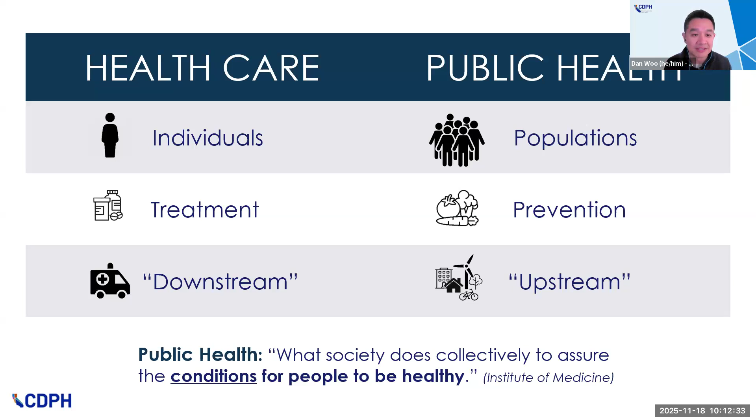As I learned more about public health, that really connected with how we designed and planned and built our communities, whether or not people can walk and bike to places. That really looks at the population level and how do we prevent poor health outcomes and illness and disease from occurring in the first place. So that takes more of an upstream approach, looking at our natural and built environments, our socioeconomic environments as well. At the bottom of the slide is a definition that my team really likes to put forth: public health is what society does collectively to assure the living conditions for people to be healthy. This is based on the Institute of Medicine's definition.

Again, some more background conceptual diagramming here. Part of addressing public health and looking upstream is to focus on root causes, or the causes of the causes, for negative health outcomes. That is linked to the root causes of unfair or inequitable living conditions that result in poor health outcomes for certain populations versus others.

For those in the public health field, this is not new information. Studies have found that only about half or so of our overall health outcomes is because of medical care, healthy behaviors, genes, and biology, while the other half is really attributed to what are known as the social determinants of health - environmental quality, social and economic circumstances, our built environments - and all of that in turn shapes our stress levels, our behaviors. That touches on things like smoking, diet, and exercise. Our goal in public health is to move towards the left, upstream, towards these broader solutions that can help prevent what you see on the right side of the slide, which is more of that downstream disease and injury. So living conditions at the center is where there's a lot of opportunity.

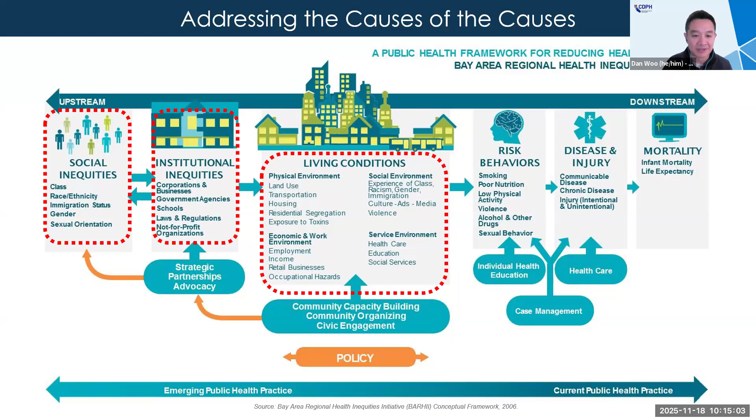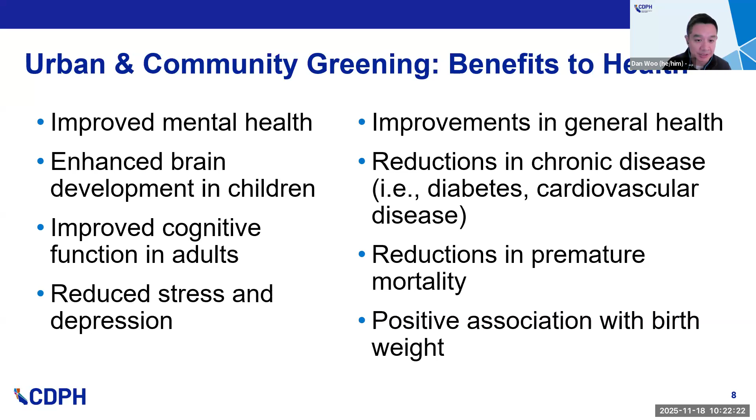I'll also touch upon how urban greening can really help to promote physical activity and social cohesion, and those are also ways that can help with health.

Part of this, and I think a lot of the work that ATP grantees and folks attending this are probably already seeing and realizing, is that green infrastructure and community greening can help to encourage more transportation-related physical activity, so active transportation, like walking, cycling, and taking transit. And active modes of transport are critical because it can help to facilitate physical activity.

And the flip side of that is that the lack of physical activity contributes to the early deaths of an estimated nearly 20,000 Californians each year, primarily due to chronic diseases like heart disease, stroke, cancer, diabetes, which are some of the top causes of death in California and across the US.

So this slide is showing some of the findings that our team did to quantify the health benefits associated with more active transportation. This modeling exercise specifically looked at what some of the health benefits would be if we were to meet the California Transportation Plan's 2050 goals for increased active transportation.

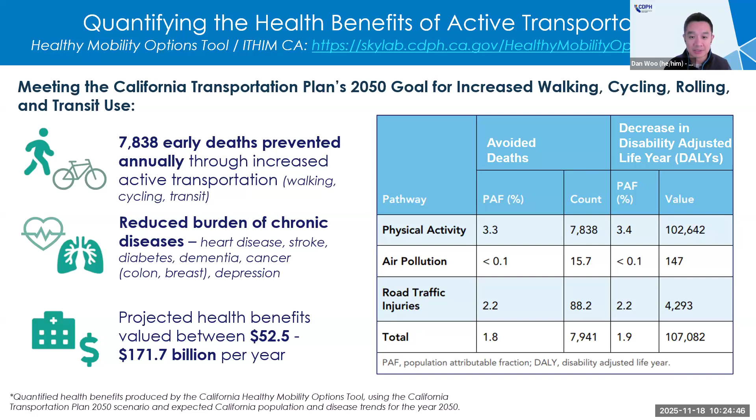A key point here is that the health benefits are predominantly from increased physical activity versus other benefits. So you will see some reduced air pollution and carbon emissions, but that physical activity piece is just super, super important.

So next, I want to dive a little deeper into extreme heat. That is the top extreme weather-related cause of death, and it's something that California has increasingly faced. Green infrastructure can definitely help increase resilience to hotter temperatures in our neighborhoods.

I'll go back to the backdrop of climate change, which is leading to more frequent, more severe, and longer periods of extreme heat. Last year was the hottest year on record globally.

Heat is deadly. Heat kills more people than any other extreme weather related hazard, approximately 1,220 people dying from extreme heat every year in the US based on estimates. We know this is an undercount because a lot of the deaths that are heat associated are not officially recorded on death records as being due to heat. It could be a cardiovascular reason, but that may have been triggered because of hotter temperatures.

So here we see many ways that heat can affect our health. I won't go into all of them, but some are fairly common knowledge, dehydration, heat-related illness and death. Heat really can worsen chronic health conditions, whether heart conditions, respiratory, or kidney disease, and effects like pregnancy and birth outcomes.

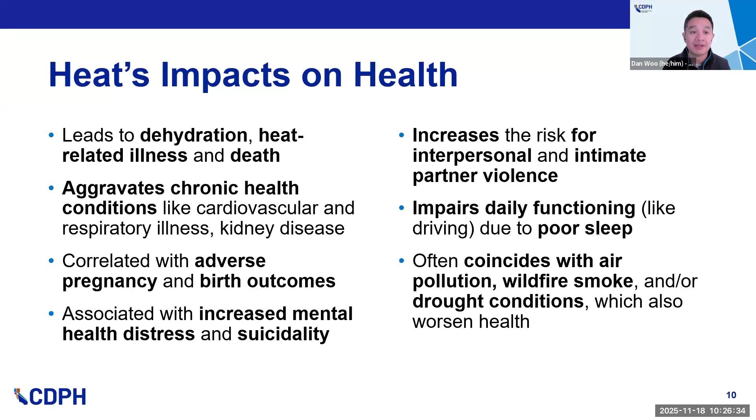I'll zoom out a little more. I talked about the individual level heat impacts. At the community level, how we design our neighborhoods and cities really impacts how people experience heat and how they fare overall on hot days.

In many ways, cities are hot by design. There's a lot of asphalt and heat trapping building materials like dark roofs and lack of vegetation and tree canopies that cause our cities to experience the urban heat island effect, leading to things like schoolyards being too hot, posing significant health risks to people, and particularly to children.

And how we've designed our suburban neighborhoods—a lot of the sprawling, car dependent neighborhoods just result in more cars on the road, emitting heat waste and a greater amount of paving of natural landscapes and farmlands for roads. That also reduces cooling land cover.

Air conditioning can help in the short term, but relying on it too much can also create more risks for the long term, contributing to greenhouse gas emissions, which has implications around energy use and costs for households. All of that is to say that we are facing a lot of complex, multi-layered issues around heat.

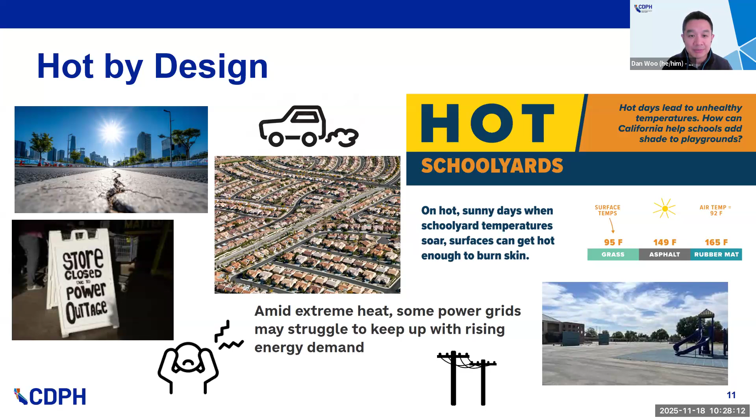But the good news is that we have a suite of solutions available, one of which is green infrastructure strategies. Lining streets with trees with native plants and adding green roofs and walls are an important part of creating cool corridors to reduce the urban heat island effect and air pollution.

Shade is one of the most effective ways to cool our bodies outdoors, just reducing the amount of direct heat exposure when we're outside. This is where shade trees can really significantly reduce the amount of heat and exposure to people in buildings.

There's been a lot of great research and work being done by the UCLA Luskin Center for Innovation, led by Dr. Kelly Turner and team, around heat and heat resilience for communities and urban environments in particular.

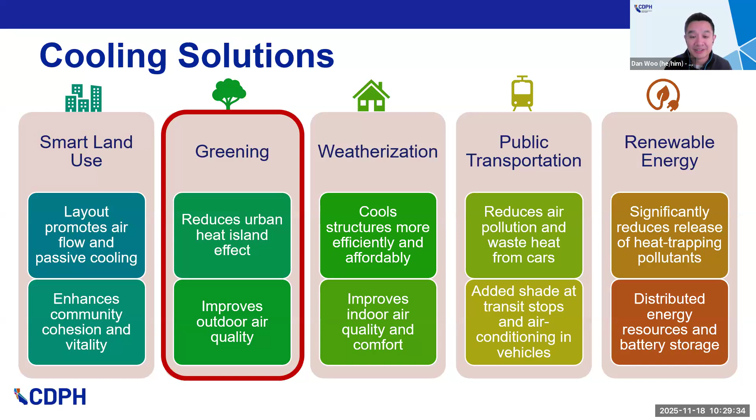They found that shade can reduce outdoor heat burden as much as 30% or more. This can provide critical relief to communities that have less resilience or greater vulnerability to heat. So greening is an important part of our toolbox for ensuring safe and livable communities.

Finally, I'll touch upon some other funding options folks may be familiar with. We have the California Natural Resources Agency's Urban Greening Program, which funds projects that reduce greenhouse gas emissions, but also helps increase the greening in our communities. And CAL FIRE's Urban and Community Forestry Grant Program works to increase the long-term benefits trees provide, and also to mitigate the risk of environmental harms and exposures. At this moment, these grant programs don't currently have an open round of funding, but you can sign up to receive notices when the next round becomes available.

So with that, I will wrap things up. Thank you very much, and I'll turn it back to Alicia and team.

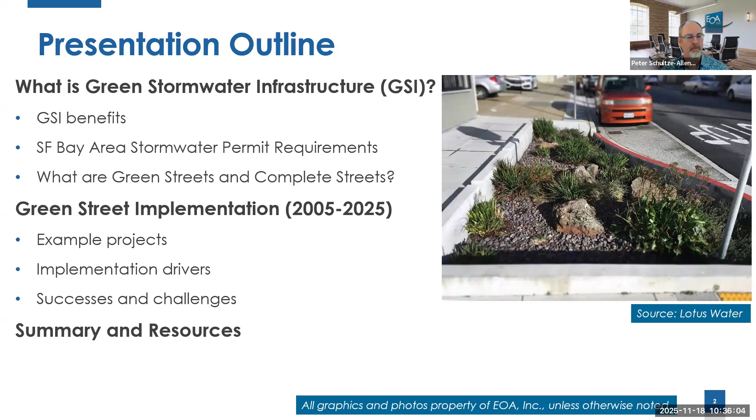I'll talk about the benefits of GSI, our Bay Area stormwater permit requirements, and what green streets and complete streets are. I'll give examples, discuss implementation over the last 20 years, challenges and successes, and what's driving implementation of green streets. Then I'll give some resources and a summary.

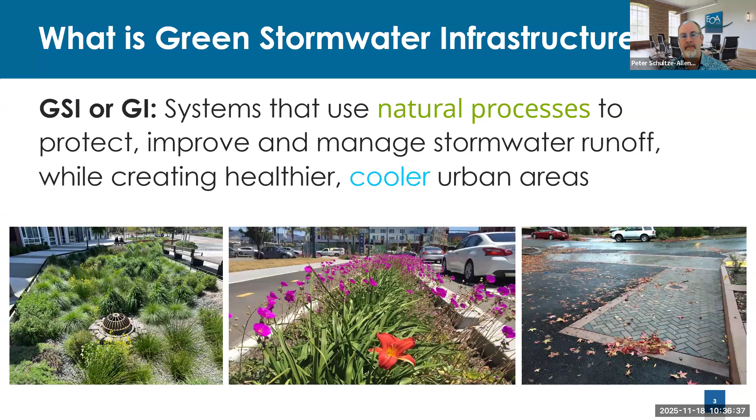We've already talked about this, so I don't need to spend much time defining GSI or green infrastructure, but basically we're using natural processes in the urban environment. These are photographs of different systems around the Bay Area. Cooler urban areas is the goal in a lot of ways now, and we want to use GSI to increase that cooling effect and cool cities in general.

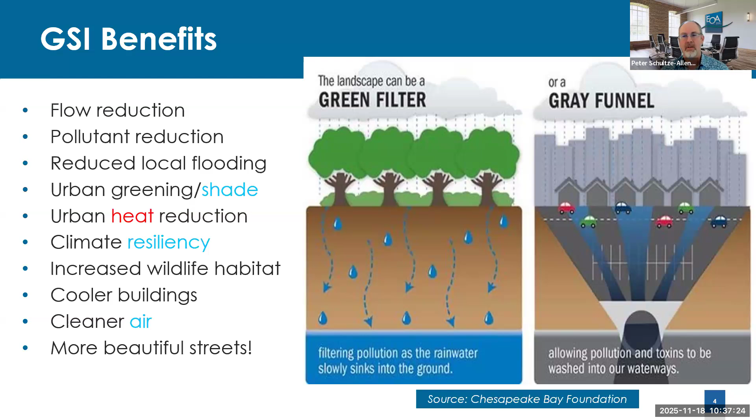There are a lot of benefits, many of which we've already heard about today, so I won't go into detail, but I highlighted heat and shading, resiliency, and cleaner air. We like this graphic showing how GSI can act as a green filter, whereas our typical situation has a lot of impervious surfaces acting as a gray funnel. This isn't just about pollution, but also temperature into receiving water bodies like the San Francisco Bay, the volume of water, and sediment and erosion. There are many different aspects of stormwater management.

That leads to my background point: we're changing our approach to stormwater and now recognizing it as a valuable resource. However, it can be polluted by various impacts in the urbanized environment, sometimes from legacy pollutants. This can result in certain fish not being recommended for consumption by certain populations or at certain frequencies. So we're trying to improve the quality of our stormwater and use it more as a valuable resource.

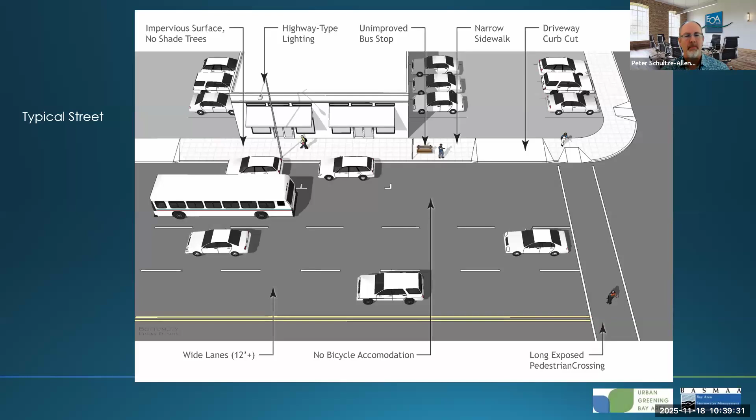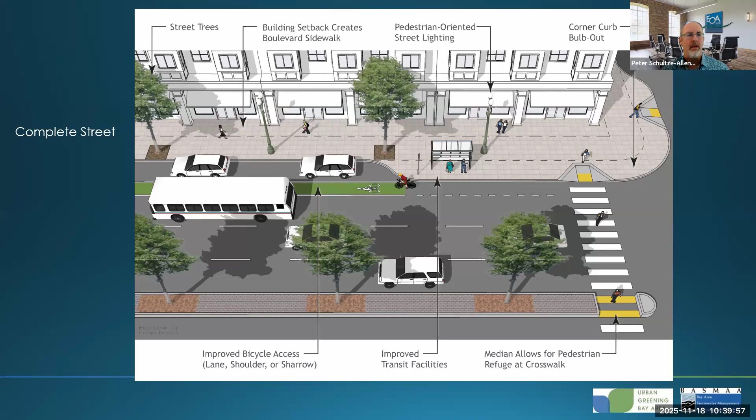The MRP requires certain types of roadway projects to implement GSI. I wanted to give this example - a nice graphic with 3 parts showing a typical street before improvements. It may have very wide travel lanes, narrow sidewalks, not a very pedestrian or bicycle friendly environment - it's really designed for cars, maybe with some transit facilities. But if you change that to a complete street, which many in this audience probably know about, you get new facilities for transit, cycling, and pedestrians, plus urban greening with more street trees and expanded sidewalk area through bulb-outs. There's a lot you can do with complete streets.

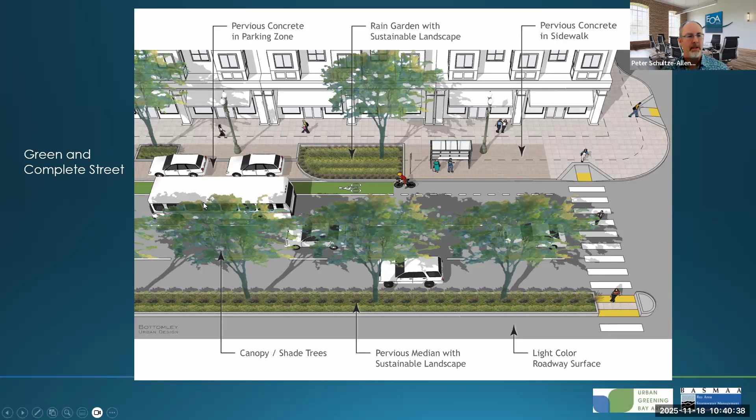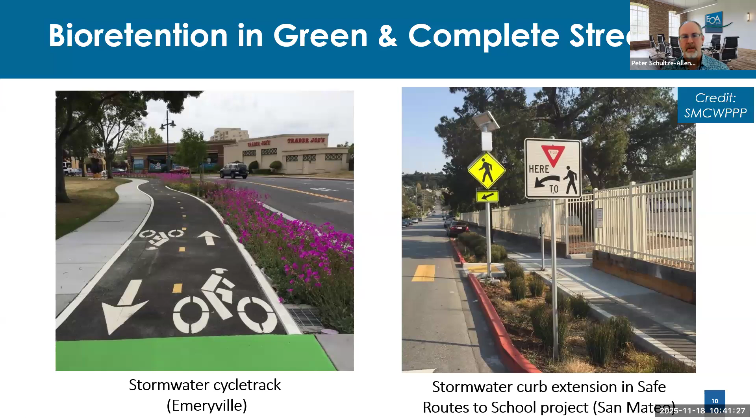And this was a project in Emeryville that used some other funds from the county transportation agency. Pervious pavement in roadway projects can look like some of these examples. These happen to all be from Berkeley, which is using a lot of different types of pervious pavement in different projects. So you have the pervious interlocking concrete pavers where the water goes between the pavers into these joints which have gravel in them.

Compared to that, you have pervious pavers where the water can actually go through the paver itself, as in the example at the bottom. Here's another pervious pavement with concrete in these modular systems, which can be called a pervious concrete gutter area. And then you can use gravel with supported grid pavements to support the gravel and make it stronger, so it can support cars or other vehicles. It's typically used more in parking lots, but it can also be used like this.

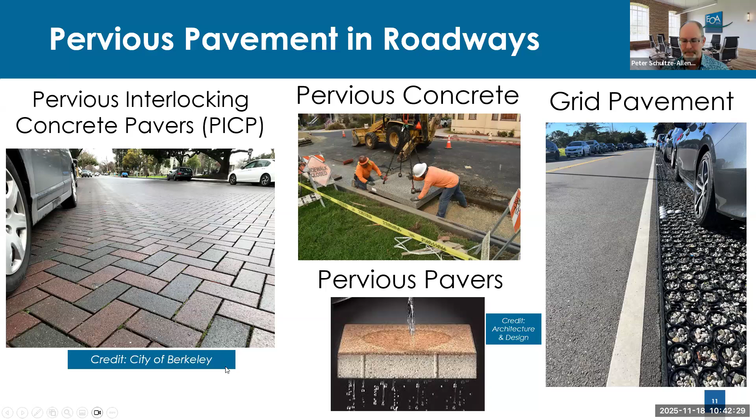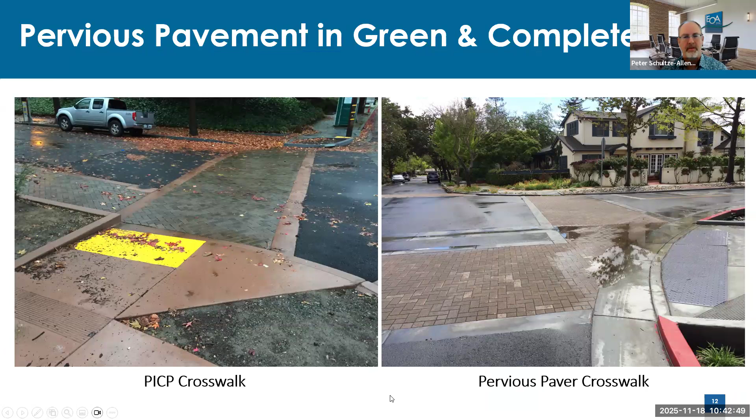Pervious pavement in other types of projects—these are also in Berkeley. Actually, the one on the left is in Berkeley, and the one on the right is in Palo Alto. This is pervious pavement in a crosswalk, and those two examples show two different types of pervious pavement. And then this is a great example from the city of Campbell on Hacienda Avenue.

This is one of our largest green complete street examples in the Bay Area. It was a very wide roadway that was in poor shape in terms of the pavement. They didn't have any bike facilities, the sidewalks were not complete, so they had a lot of potential with such a large roadway.

And this is what it looked like afterwards. This was completed, I think, back in 2015 or so, about 10 years ago. They reconstructed the pavement with full depth reclamation and added bioretention areas on the side of the roadway. They added bicycle facilities, bike lanes, planted trees in these little bulb-out areas, and some also in the bioretention areas, and added sidewalks to the whole mile-long section of Hacienda Avenue.

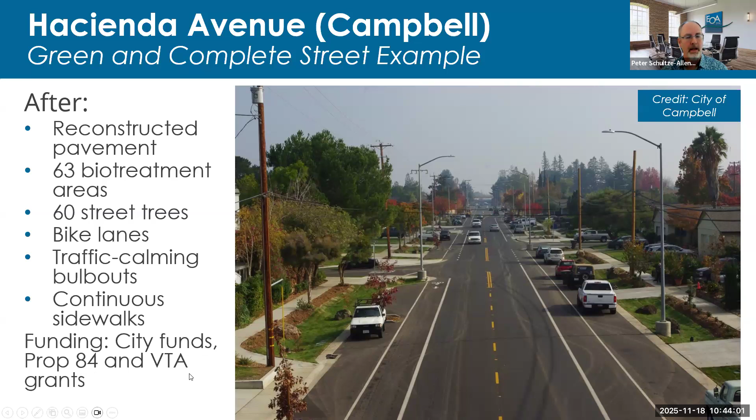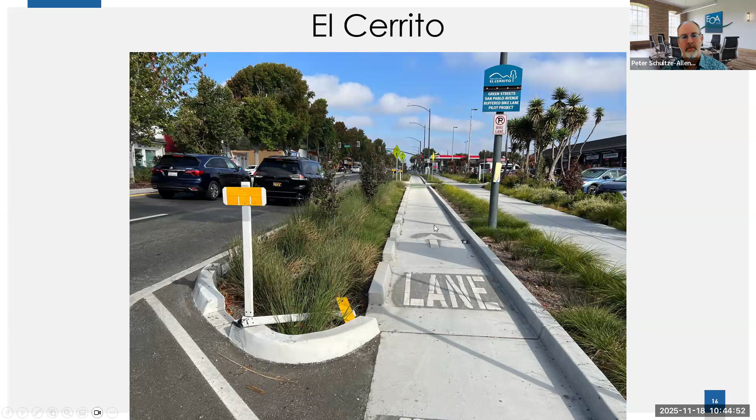Here's an example in El Cerrito on San Pablo Avenue, also a Caltrans facility. They worked together with Caltrans on this project to put in this protected bikeway with, in this case, the bioretention in between the travel lanes and the bike lane or separated bike path.

So now a little bit about implementation. What is driving these projects? Well, there's certainly stormwater quality related drivers, usually through our stormwater permit. So sometimes there are projects that are triggered and they have to provide stormwater treatment measures. Sometimes they're looking for opportunities in a capital improvement project. We also have now in the new permit implementation targets for GSI.

But we also look at other programs and try to integrate green streets into other types of projects when we can, because if you do green streets on their own, a retrofit project is more expensive. Integrating it with other programs like transportation projects makes it less expensive. We're trying to do as much as we can with urban forestry, and there's a lot of potential there. And then looking at your climate adaptation or climate resilience plan, climate action plan, and urban heat—I'm glad to be here today talking about public health. So that's a great aspect of working with other departments and programs and integrating green stormwater infrastructure into these other programs.

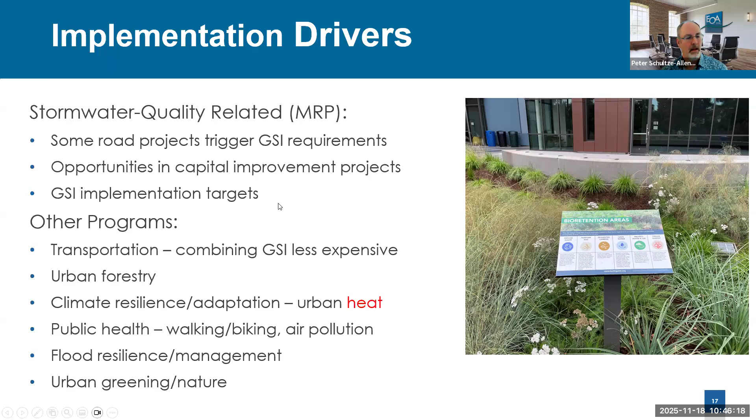So some of the successes that we've had are related to achieving these multiple benefits that meet the municipal goals, both for the stormwater permit and for other types of municipal goals, and public expectations of having projects with multiple benefits. Public agencies are gaining more experience with GSI construction and maintenance around the Bay Area. We have about 200 green street projects that have been installed around the Bay Area in these communities under this one municipal regional permit.

Over the last 20 years, urban forestry has been integrated with GSI. Pervious pavement is being done too, although I'd say most green street projects use something like what's shown in this image, with bioretention and small plants. We're still learning how to do it with trees and how to install pervious pavement.

And there's a lot of training happening, which is great, with organizations like Rescape, which is a regenerative landscaping nonprofit trade association, the Watershed Project in Richmond, Grassroots Ecology over on the peninsula working with, for example, the city of Palo Alto, and the Conservation Corps in San Jose.

Some of the challenges are just finding opportunities to do complete green street projects. It's not always so easy to do that, so we're struggling to find opportunities, especially cost-effective ones. There's a lot of utilities under roadways, and when you're installing GSI, you can run into those utilities and have conflicts with them. So that's a challenge.

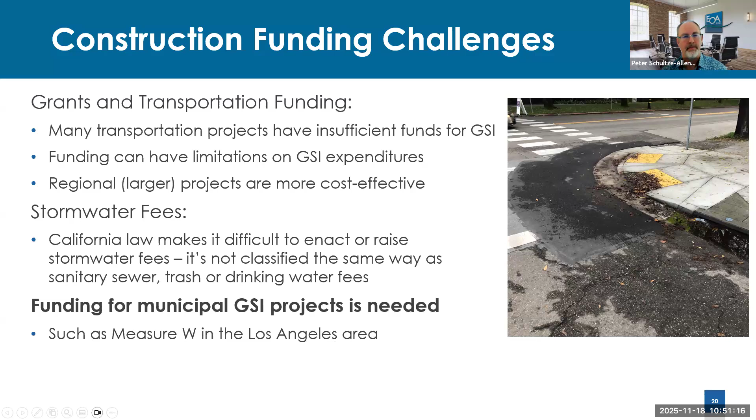Also, maintenance is very challenging, both getting the funding for it and implementing it. Grant funding for transportation projects typically doesn't pay for maintenance—most grants don't. They pay for the capital, construction, and design. But then the maintenance burden can become expensive for a city, county, or public agency.

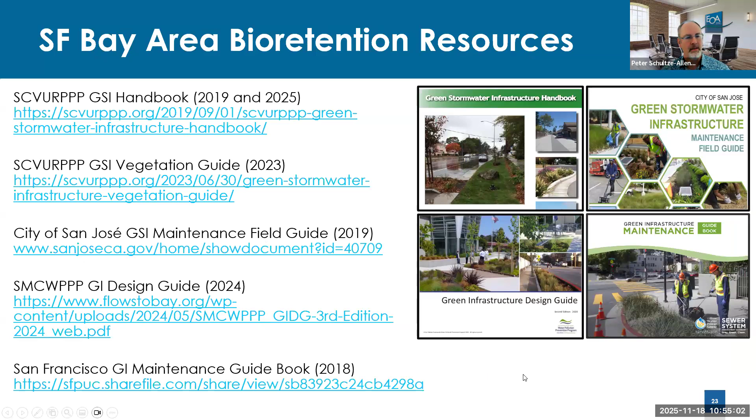But we are seeing a lot of multiple benefits from doing GSI, and that is definitely a success. So to wrap up, I have some resources about green stormwater infrastructure, and bioretention is one of the main ones we use. These are 5 different resources from around the Bay Area that you can refer to, and this is my contact information if you want to follow up with me after the workshop.

So that's the end of my presentation. We can see if there's any questions just for me, or we can wait for later.

Yeah, I'm not sure. No, thank you, Peter. Wonderful presentation. We do have some questions in the Q&A, but we'll hold off and listen and answer some of those at the end of everybody's presentations. Thank you so much for all that wonderful information, and so good to see how communities in the Bay Area are really taking advantage of this stormwater management system. So thank you.

All right, moving along, I'll introduce our next presenters. With us is Anthony Pham, currently a program coordinator with the California Conservation Corps. In addition to his main role, he also serves as the ATP Corps Consultation Liaison, where he manages and processes Corps consultation for 3 program cycles. He is dedicated and enthusiastic about supporting the Corps' mission by fostering collaboration with ATP applicants and awardees. Co-presenting with him is Sarah Ward, a special advisor with Environmental and Energy Consulting. She supports the representation of the California Association of Local Conservation Corps, managing and processing consultations. In her previous project management role, she acquired experience in full project lifecycle management for state and federal grant programs and regulatory compliance. She is excited to support new and returning ATP applicants interested in this vital program, which helps bring work experience and training opportunities to young people.

So thank you, Anthony, I will turn it to you and to Sarah. Let me know if it's sharing the full presentation mode. Yeah, I see it on presenters. Maybe it's sharing the wrong screen again. Let's do... not a worry. Okay, how about now? That looks perfect. Yep. Sorry, one moment here.

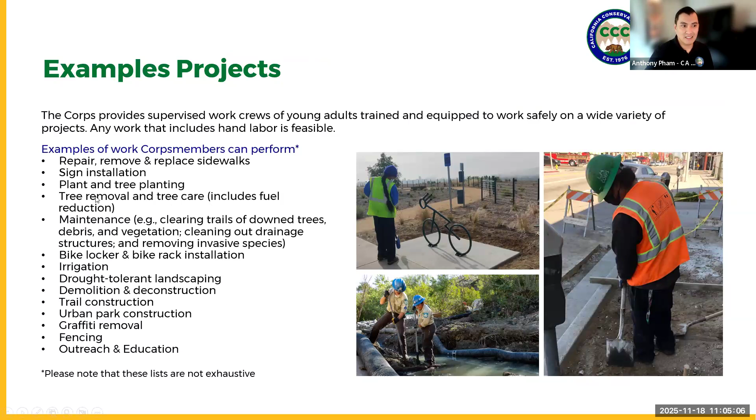Thanks, Anthony. All right, so the benefits of using the Corps. Utilizing the Corps is included in legislation to enhance the public benefit of projects by creating workforce development opportunities for young adult Corps members, many of whom live and work in disadvantaged communities and vulnerable populations. The Corps and natural resource projects provide comprehensive job training, career development, educational opportunities, and career pathways for young adults to enter specialized fields, including firefighting, forestry, energy conservation, and other environmental fields. And because Corps members often work on projects in their own community, they gain an added satisfaction in their work, along with building community connections.

Next slide. All right, so the Corps consultation process. There are 3 key steps to engaging in the consultation process. First, the applicant visits the CCC consultation webpage and submits their project details via the web form. Second, both Corps will review the project's feasibility and notify applicants within 14 business days whether either Corps can participate. Third, the applicant will provide evidence of the consultation and Corps' determination to include in their grant application submission.